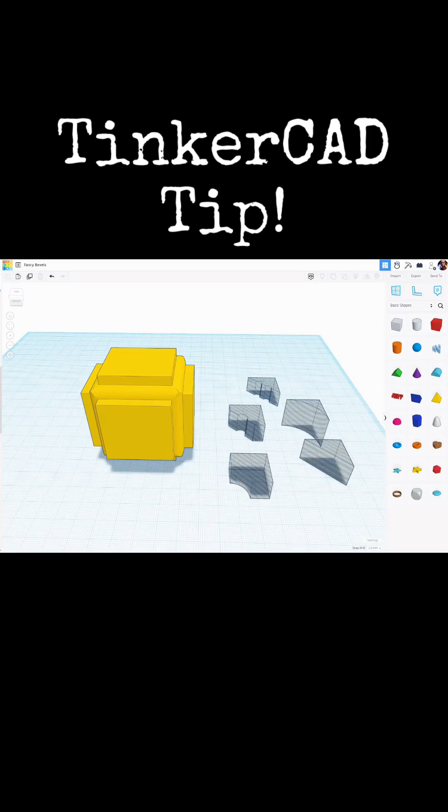TinkerCAD tip. Welcome back. I had a follower ask a question about chamfering edges, so I'm going to take it one step further and show you how to make fancy bevels like what I did on this object, how to create those, and then how to save them so that you can reuse them in other projects.

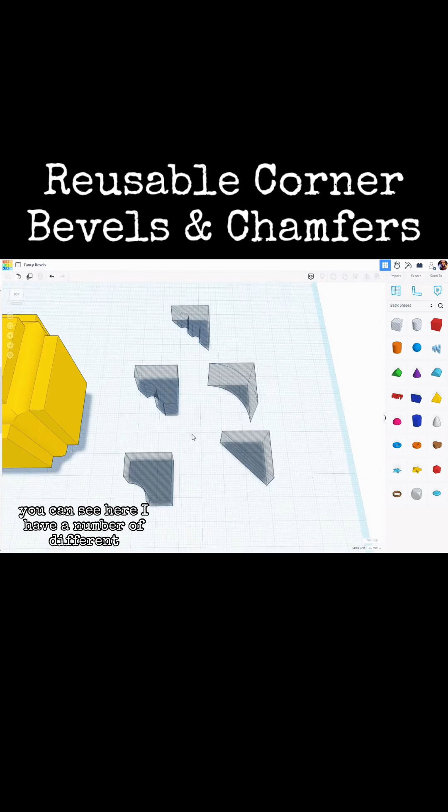You can see here I have a number of different hole shapes that are different bevels that can be used. For instance, if I break this apart, you can see this is just a cube with a series of these bevels added in as holes. Let's group that back together.

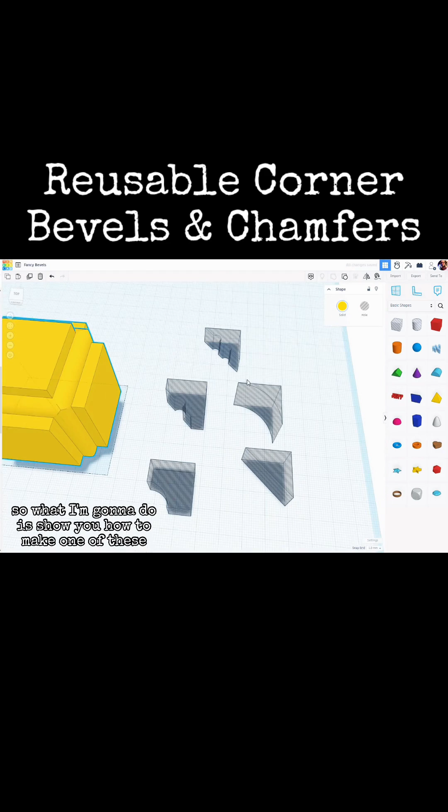So what I'm going to do is show you how to make one of these and then how to save them. So where these are saved, if we come up here to your creations, is where these would be saved. You can see I have these different ones where I can bring them out and reuse them.

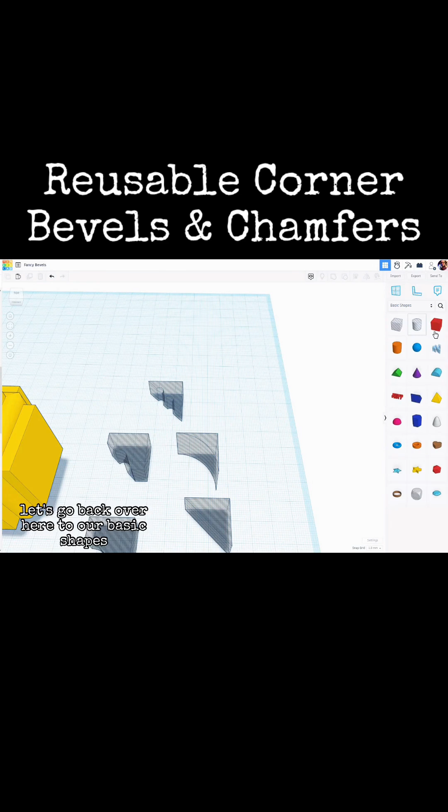So let me show you how to make one of those. Let's go back over here to our basic shapes. Let's bring out a cube, and this is 20 by 20. Let's bring out this triangle shape.

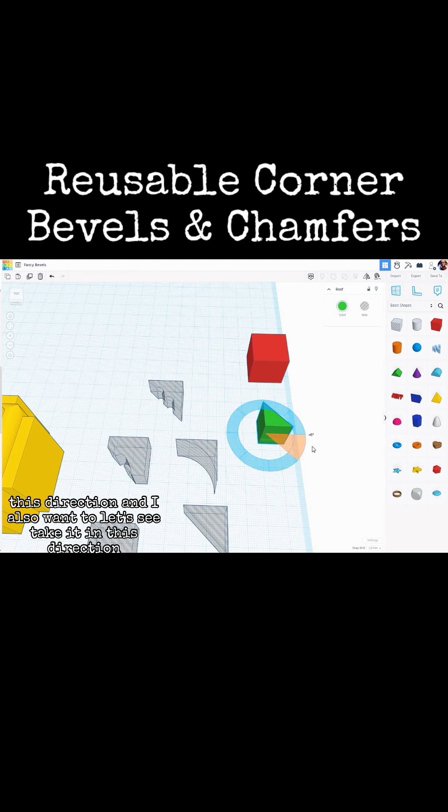Holding the Shift key, I'm going to rotate it up this direction, and I also want to take it in this direction. D to drop it to the work plane. Let's zoom in here and make sure this is also 20 by 20. Holding the Shift key, I'm going to click here and change this to 20.

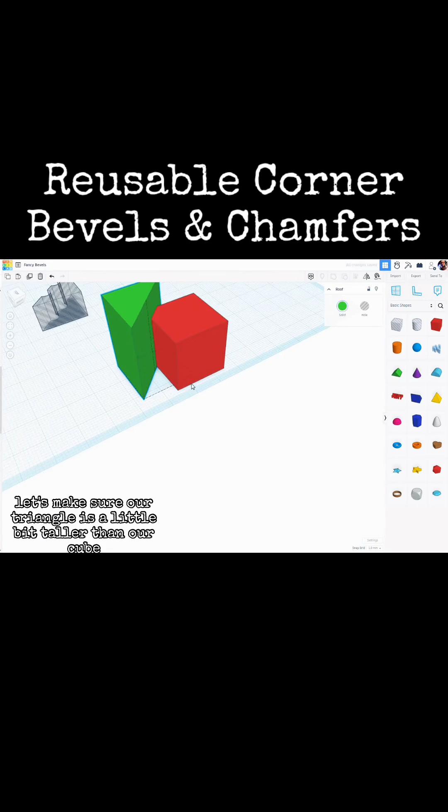Let's make sure our triangle is a little bit taller than our cube. We'll select them both and do an alignment on those, center to center. There we go. We can go ahead and bring our triangle down. Oops, let's undo that.

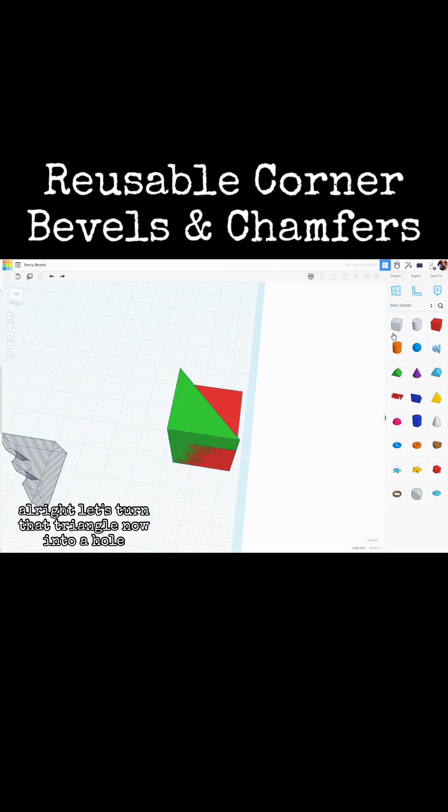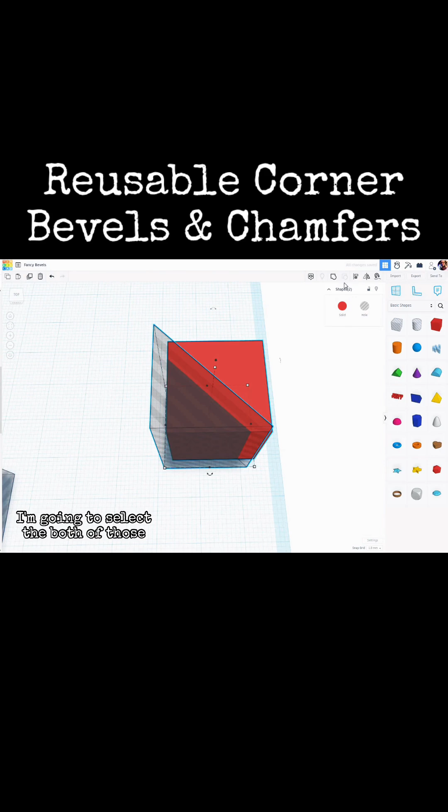All right, let's turn that triangle now into a hole. Now what I want to do is move it away from this cube a little bit. My snap grid is at 1 millimeter, so I'm going to click the cursor key down twice, that's 2 millimeters, and 2 millimeters this way. I'm going to select both of those, group them together, and now turn this into a hole.

And let's bring this down to say, 5 millimeters is tall enough. So now we have an object here we could use as a bevel.

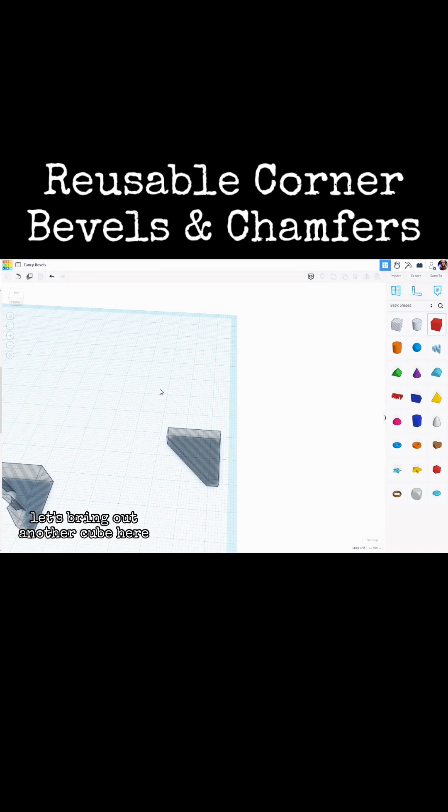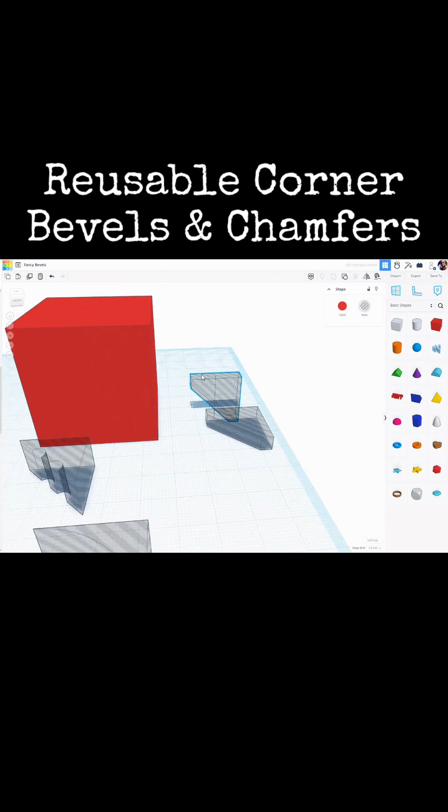For instance, let's bring out another cube here, and let's resize this to be 40 millimeters cubic. Let's take a duplicate of this. Let's come to the side here, holding Shift, let's rotate it up. Let's go ahead, holding the Shift key, and size it down a little bit.

There we go. I'm going to Shift select my cube. We're going to do an align, click on the cube, and align it this direction and this direction. There we go. Let's click on our whole object here and change this measurement to be 50.

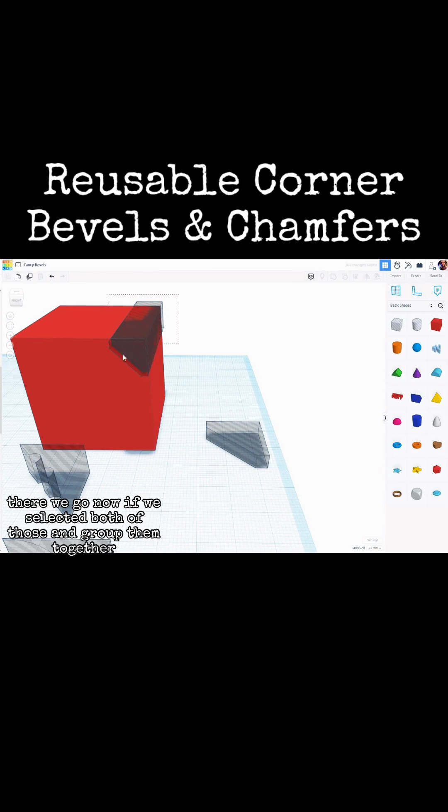Let's slide it down. There we go. Now if we selected both of those and grouped them together, you'd see where I have a fancy bevel on there now, and that could be done on all sides.

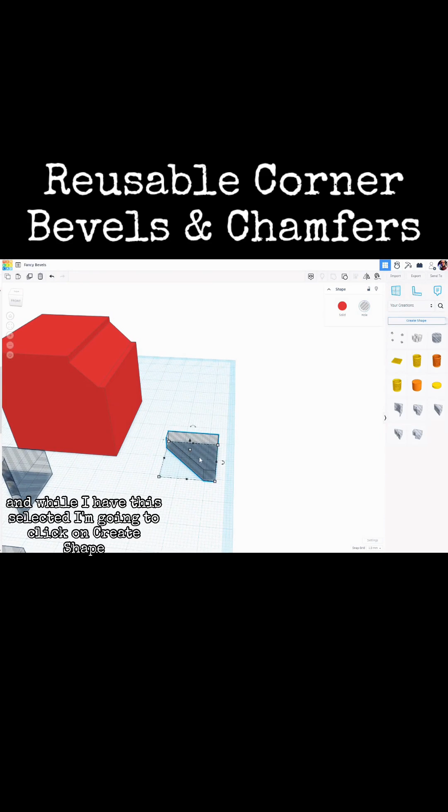So now I want to make something that I can reuse here. Let's reuse this, and what I'm going to do is click on your creations, and while I have this selected, I'm going to click on create shape. We get this little pop out here. I'm going to give it a name. We'll call it diagonal bevel.

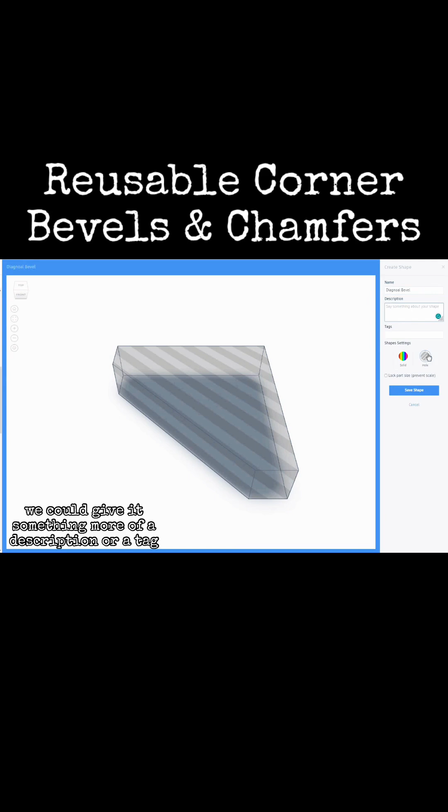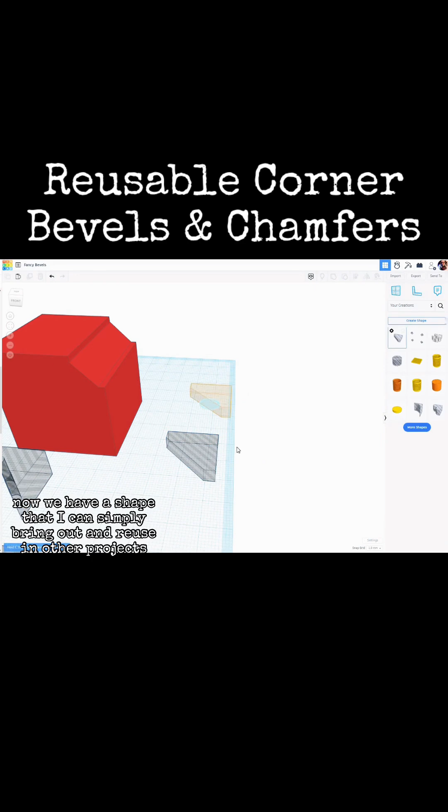We could give it something more of a description or a tag. It's as a hole. There's also this setting for lock part size, prevent scale, and I don't want to do that to this part because I want to be able to change the scale or size in other projects. I'm going to click on save shape, and now we have a shape that I can simply bring out and reuse in other projects.

So, a simple way of creating fancy bevels or chamfers that can be reused in other projects under your creations.